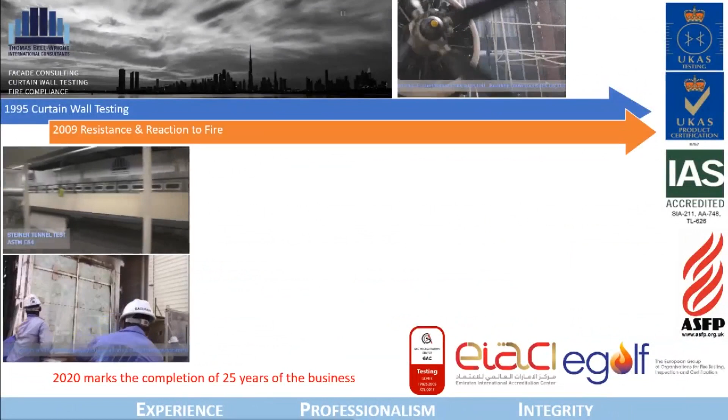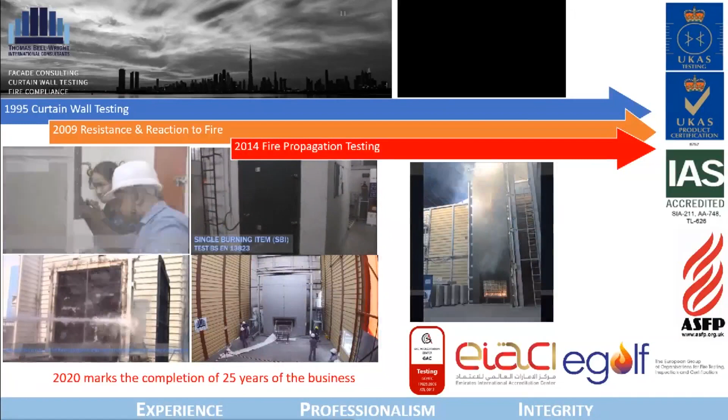Over the years, we expanded into doing fire testing, starting with a 3x3 furnace and a Steiner tunnel for reaction to fire tests. Over the last 7-8 years, we've expanded into reaction to fire as per European standards, as well as fire propagation tests as per American and British standards.

We also recently added 2 large furnaces for fire resistance tests, a 4 meters by 5 meters vertical furnace and a 4 meters by 5 meters horizontal furnace, both with load bearing capability, expanding our offering to probably the largest laboratory for passive fire protection products testing across East Africa right up to Bangladesh.

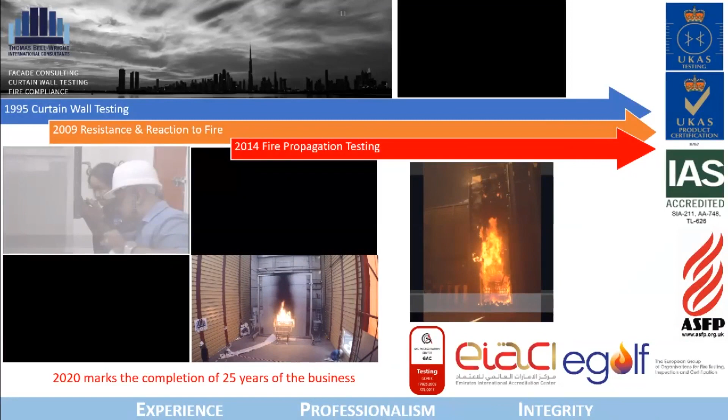Welcome everybody. We are today at the last session in the awareness series that we started back in April, and it has been a very interesting journey.

We have focused on passive fire protection and compliance, gone deep into comprehension and understanding of various aspects of passive fire protection compliance, understood what is a good way to procure and specify, and today we will talk about a very important aspect - after the installation, after the procurement and installation is started. This is a key element for the implementation of fire and life safety strategy.

A lot of us know that passive fire protection, a key element of fire and life safety, has worked over the last 3 decades. You would notice, as per this graph, that the number of fatalities have reduced drastically, showing that the strategies that have evolved over the years have worked very well.

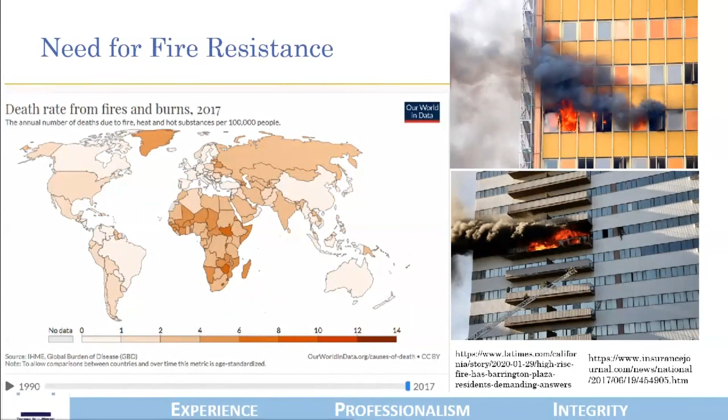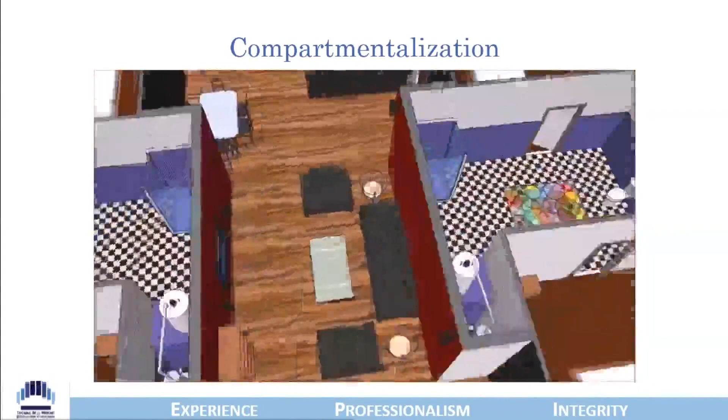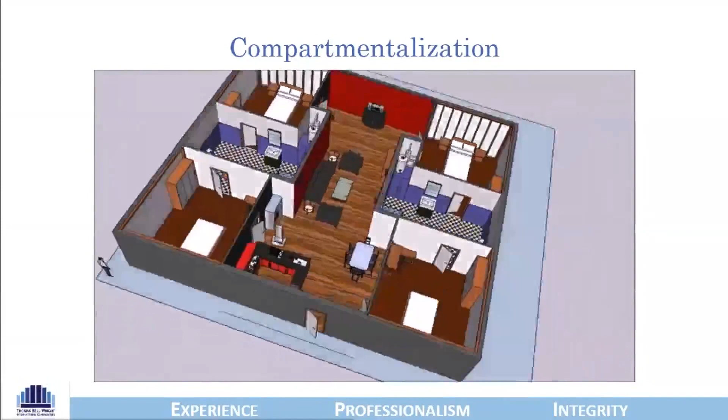A key strategy which comes out of passive fire protection is called compartmentalization. A lot of you might already be familiar with this as a fire resistance concept. As a basic, if a fire starts anywhere in a building, whether it's an office, a house, or any occupancy, it is designed such that the fire is contained within the place where it began. This is the basis of passive fire protection, so the fire should not grow and should be limited to where it started.

Now, in order to compartmentalize... I'll take a pause and get quick feedback if someone can reply back saying if I can hear, because I'm getting messages from some people whether it's starting or not. Could someone give me a ping back that you can hear me properly?

Super. Thank you so much, Mohammed.

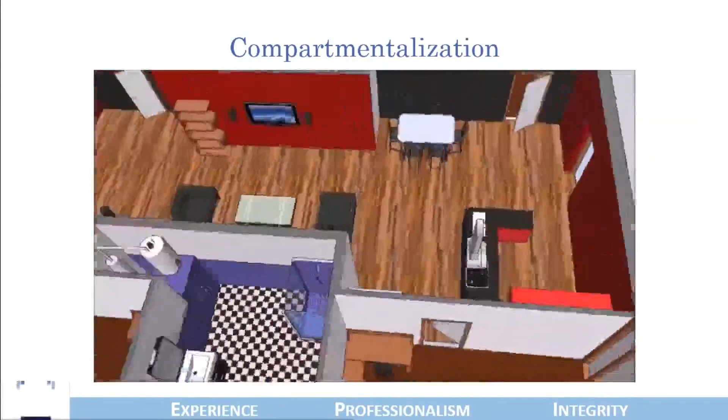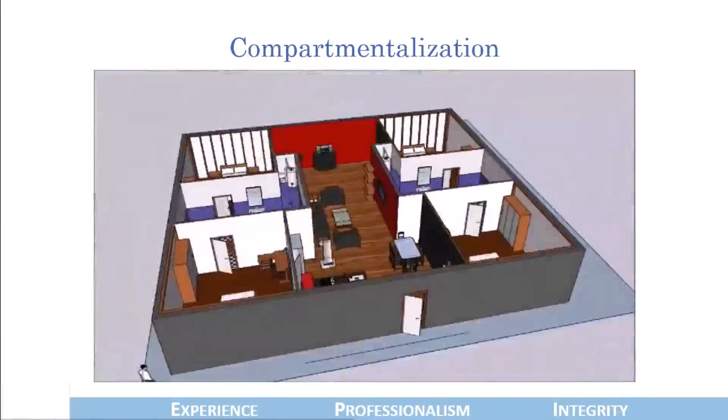So coming back, how do you make containment for any occupancy, any type of room that we are in or have seen? We would notice that we have wall systems and doors, which we all know to be fire rated. But for any building in any compartment to communicate with the outside world, we need openings, and these openings range from mechanical, electrical, plumbing, HVAC, and so many other types of breaking into what is a compartment, because all of us cannot live in an airtight, watertight place.

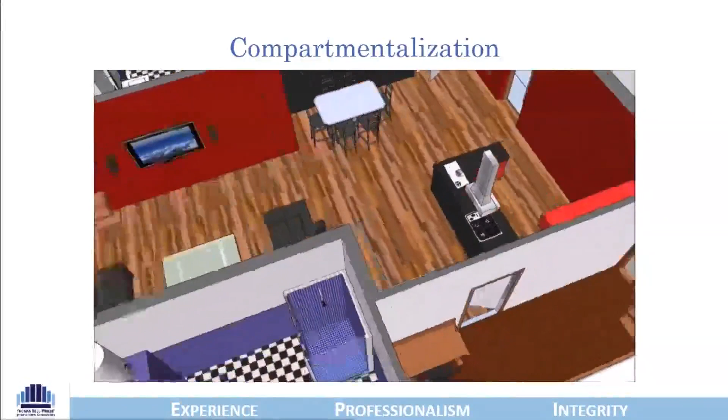So how exactly does the compartment get broken? People familiar with openings and fire stopping and MEP work know that whether going over the false ceiling or in several parts of the building with ducting, electrical cabling and piping, the compartment is broken into to create way or make way for various aspects that help the compartment in the building communicate with the outside world.

So what happens is someone designs and implements passive fire protection, procures approved products and materials, installs them correctly, and then as a next step, as part of MEP work and many other things, these fire-rated compartments are cut and broken into, and a lot of the walls and original designs become derated or no rated. So now the next process is that someone has to re-rate and bring back the fire resistance and compartmentalization which was designed. How do you do this?

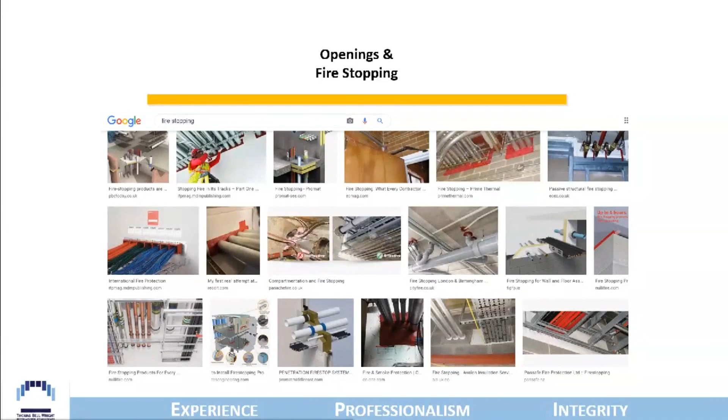This is where openings and fire stopping come in. People who may not be familiar with this, if you search the internet, there is gigabytes and gigabytes of data, images and videos describing fire stopping and how it's often done incorrectly, etc. I'm not going to delve into all such details, but specifically, we will talk about a better comprehension of how fire stopping is correctly procured, correctly installed, and correctly maintained.

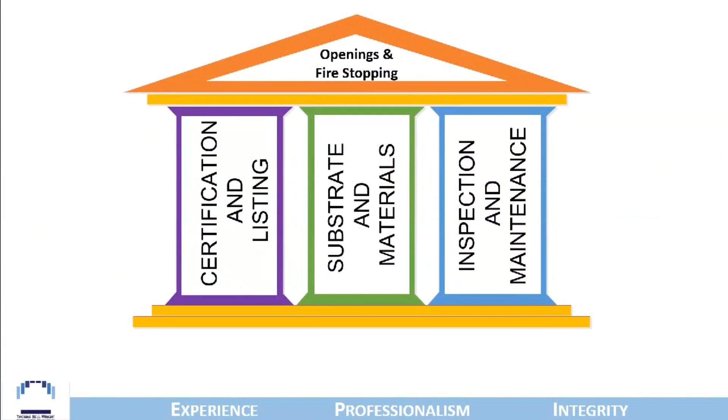And I start with some basics. I have put together some definitions with the help of my friend and colleague John Muse, who helped me create a good amount of information for my slides. So thanks to him.

I'm not going to read through all of these. The webinar is recorded, and one of the key benefits is that you can play back and read through for someone who would want to. I will just read through two types as a definition. What is a membrane penetration and what is a through penetration?

A membrane penetration is a breach in one side of a floor-ceiling, roof-ceiling, or wall assembly to accommodate an item installed into or passing through the assembly. When we talk about floor-ceiling, roof-ceiling, or wall assembly, we are alluding to fire rated assemblies, which means these assemblies are fire resistant to a given rating as per the design.

In the same line, I will read through penetrations, which is an opening in both sides of the floor or floor-ceiling or wall assembly to accommodate an item passing through the breach. The word breach is very important, as you will understand through the course of the slides, that the breach is done or the opening is made to a rated assembly.

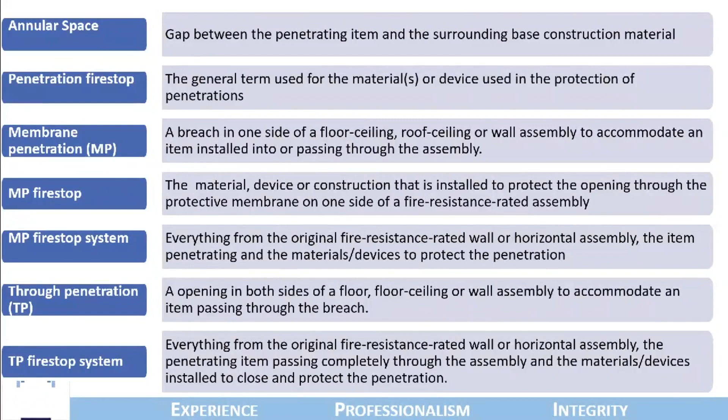These rated assemblies have been brought to shape, brought to form after many steps, right from the architects and designers who designed as per the code and local requirements what fire rating should be of a given compartment. These are cut through and broken into to facilitate the incoming and outgoing openings.

Moving on, a few more definitions. These definitions are more related to the North American standards, the F rating and the T rating. And I'll read these because these are interesting.

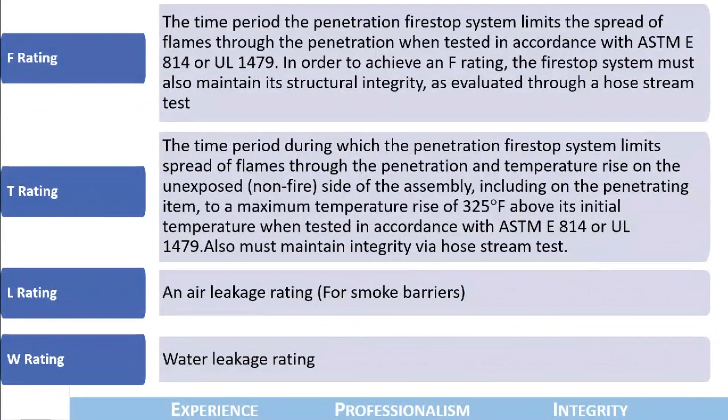The time period the penetration firestop system limits the spread of flames through the penetration when tested in accordance to ASTM E814 or UL 1479. In order to achieve an F rating, the firestop system must also maintain its structural integrity.

A T rating is the time period during which the penetration firestop system limits the spread of flames through the penetration and the temperature rise on the unexposed side of the assembly, including on the penetrating item, to a maximum temperature rise of 325 degrees Fahrenheit above its initial temperature, when tested in accordance to ASTM E814 or UL 1479.

These terms, though originally from the American codes, are often used in this region to describe similar ratings coming from the European or British test methods. An L rating is for air leakage, and a W rating is for water leakage.

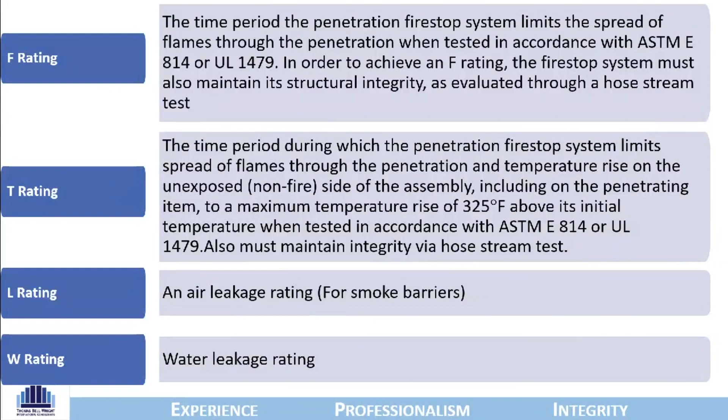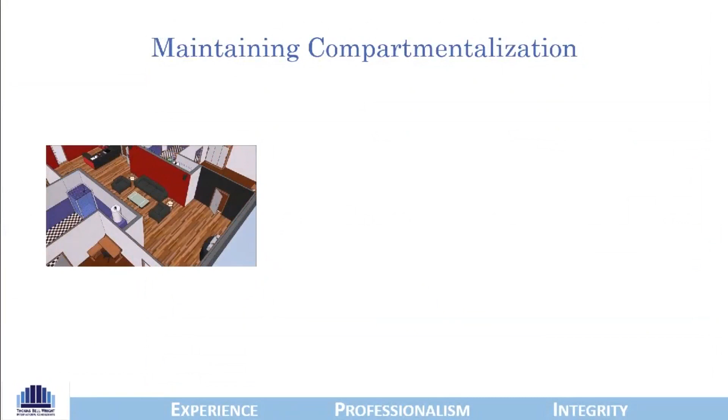Now, how do we really maintain the compartmentalization after you cut through and add on the fire stopping? A lot of us are familiar with images and concepts that when a fire happens, the compartment is able to contain the fire within.

For a few seconds, I would like you to imagine the photograph on the left, and imagine that the area above the false ceiling, above the television and the seating that you see, has openings which are carrying cables and ducts. So imagine how and with what properties the fire stopping material system design is able to contain the hot gases, the smoke, and the increased temperature on the other side of the wall where the fire is happening.

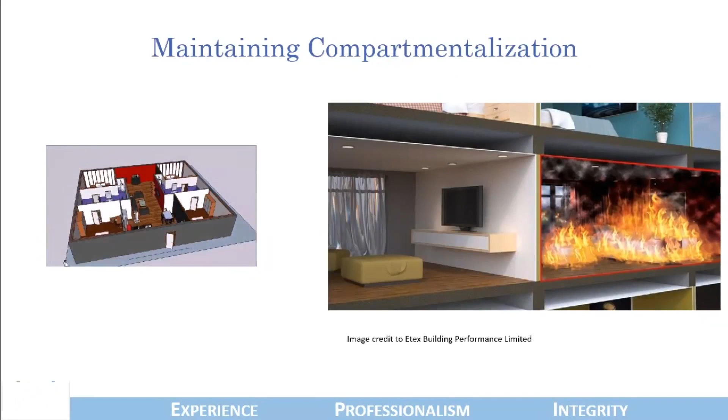This is where I would like to talk about certain properties which are used by manufacturers of fire stopping material, designers of fire stopping systems. These are primarily chemical or mechanical properties which bring about re-rating, or which help subcontractors re-rate the derated partition systems.

So let's start with intumescence. You must have heard the phrase lots of times. It is to increase in volume upon exposure to heat. An endothermic reaction, also known to a few, is a reaction when the system or components or materials absorb the heat, and using this heat, the materials decompose to create the fire resistance needed.

Ablative reaction is the reaction where the material resists heat transfer by using the heat of exposure to actually erode the material. Insulation, used in many other parts, is the property to resist the transfer of heat as a result of its low thermal conductivity.

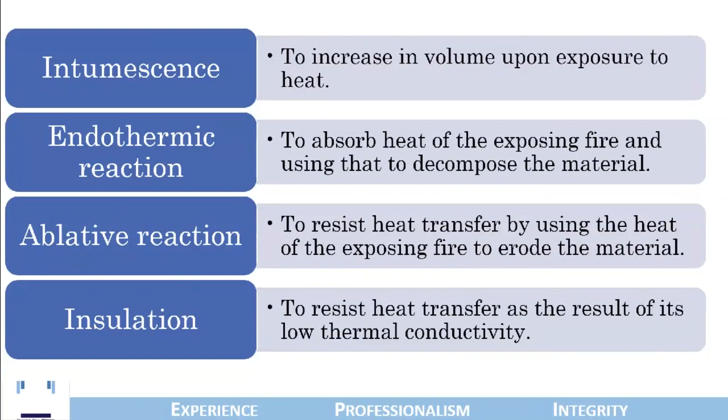Let's begin with understanding how these are validated or approved. There are typically two different methods to validate how an existing compartmentalized section of a building or an existing fire rated element, which could be a wall system or a door set, when cut through and opened, will regain its fire resistance through a series of installations and operations.

The first method is where the same test method used to validate the fire resisting element is applied. Let's take an example and imagine a gypsum board based partition wall system, which has been tested as per ASTM E119, an American fire resistance standard. Such a wall has been cut open for a cable tray as a through penetration.

Cable trays are laid and installed, and now various methods, systems, and materials are used to bring back the fire resistance rating of the wall system. The same test, ASTM E119, is performed to check and validate that the same rating can come back or not. This approach is often used

Some of you would have probably seen a fire resistance test happening for through penetrations. Sometimes these tests can be very interesting. This particular time-lapse video that you see is the European test being conducted in our facility, the EN1366, I believe -3 or -4.

These tests are specific tests for conducting or validating a general design as well.

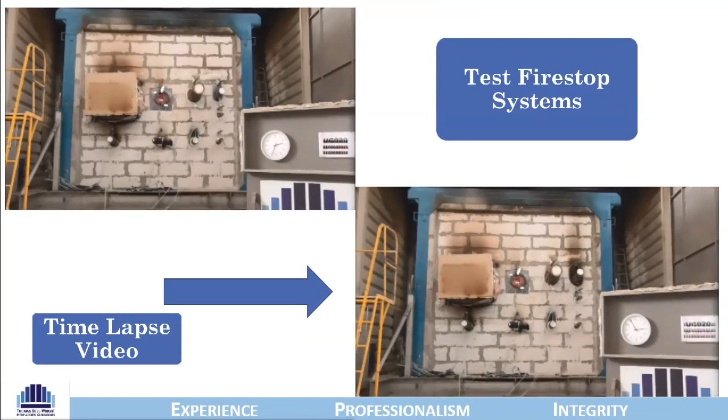Moving on, the test methods are just a simple piece of information or data that comes across for understanding how a given installation in a given set of materials which were installed in the laboratory performed.

Bringing me to my favorite subject of certification, listing and compliance, and how people often misunderstand certification. This becomes very important to understand when we are talking of solutions based on materials.

The certification of the manufacturing location is a series of steps that result in providing assurance to the buyer of the material of a given set of properties.

As an example, if we talk of caulking or mastic or any type of chemical produced in a factory, the product is sampled, tested in one or several configurations, and a comprehensive audit is done repeatedly at the manufacturing premises to check that the repeatability of that specific property, which has been validated in that specific configuration or series of configurations tested, will exist.

So the certification is of a given product, just one product. You can imagine a set of chemicals, and the certification says that these chemicals will perform as per the defined certificated property when they are installed in a given way.

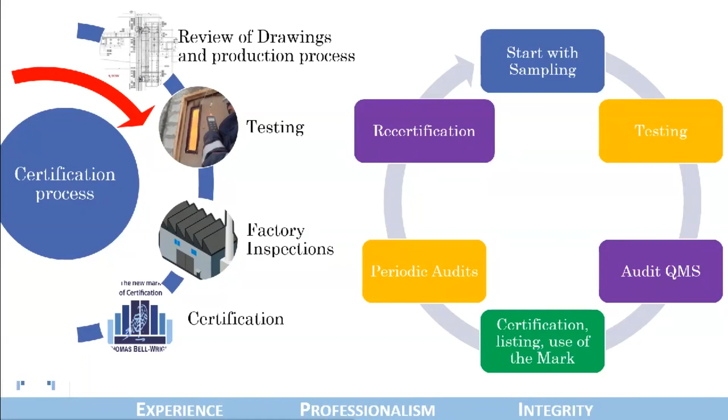And this wall system is cut through or broken into in almost any way desired by a given application, meaning the hole could be 1 inch in diameter for some cabling, or it could be a much larger opening for a large cable tray or a duct and so on. So you need a very comprehensive listing system to explain how a certified and listed fire stopping material would function and perform if it aims to come back and re-rate the partition to what it was supposed to be.

Several such codes define standard systems, standard designs, which are detailed in the directory. Often the certified manufacturer or certified manufacturing location will produce a product identified through a certification mark, a certification number. The listing goes to great lengths explaining all the properties. As an example, you see the F, T, and L ratings as compliance to ASTM E814 here, and the Canadian equivalent. These listings are often detailed not only through drawings, defining under what circumstances and in which system such performance or repeatability of performance would be available, but several other aspects are frozen.

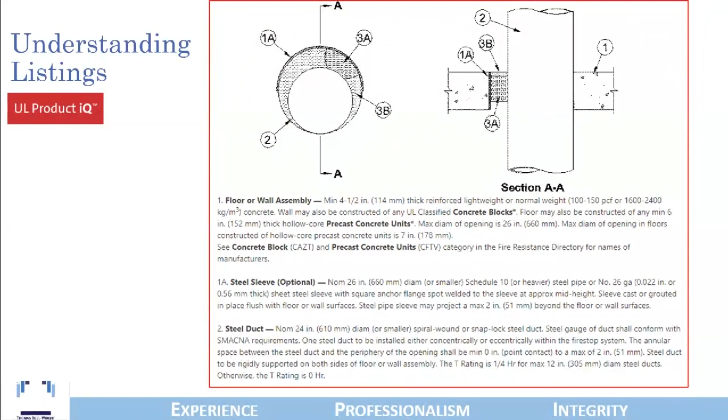I will read a few more examples for everybody to just steep a little more into this. This is from the Intertek certification directory, the Warnock Hersey directory. Often you would notice, like in this case, that the product description for the double wall duct system, which is the listing itself, runs into 38 pages. And the listing combines information about a few designs and quite a few different test methods.

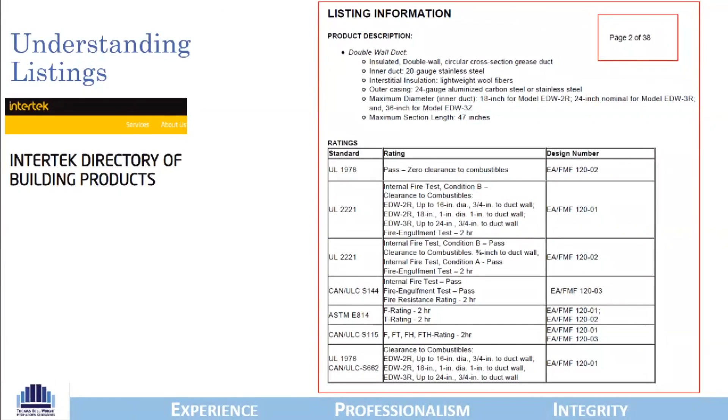This looks pretty daunting to someone who may not understand the intricacies of what this is and how it may be arrived at. It's good to step back and imagine that it started off with a project that wanted to demonstrate and prove compliance of a specific chemical compound or material, that it is able to produce the fire resistance characteristics in a given design. What followed is a series of projects and tests done to prove to certain specific projects that their materials, or materials of one supplier, can be installed in several design configurations which are detailed.

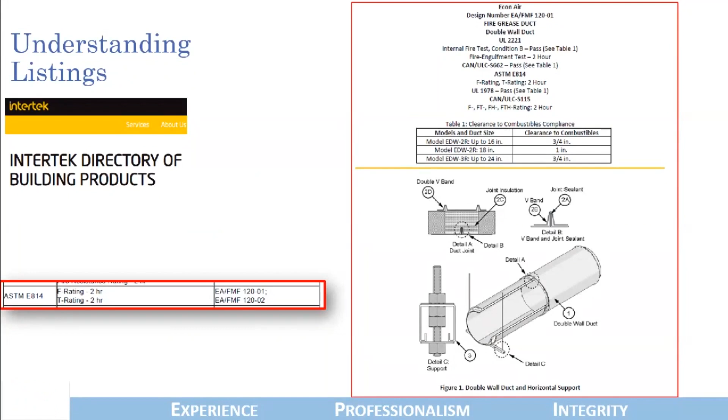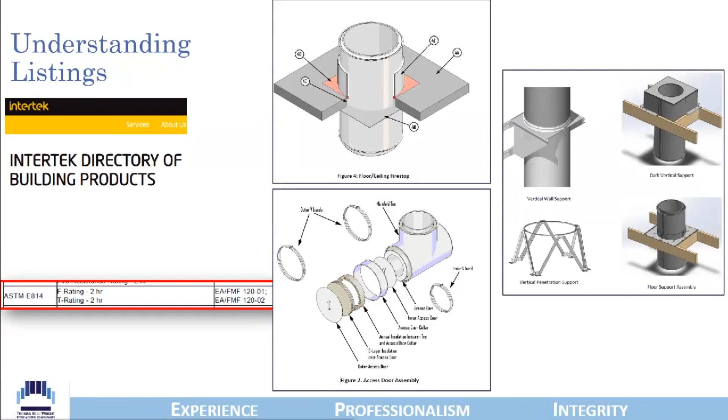These different configurations go on adding up to more and more data to prove that the given component supplier, which repeatably produces the material, is able to demonstrate this repeatability of fire resistance in several different designs. Hence, there are several product manufacturers whose listings run into many pages, because over a period of years they have conducted a large number of tests, and many tests have been correlated with data, with information, with knowledge of the certification bodies who are able to provide the assurance that a given material is able to offer compliance to given tests, provided they are installed along with defined materials, in a given detail.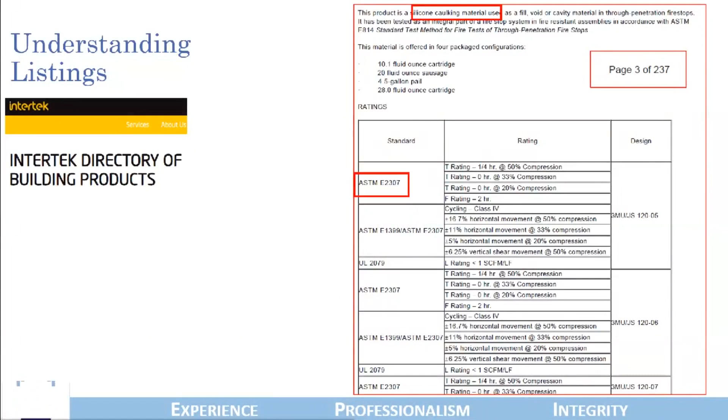As an example, this listing is of a silicone caulking material, and this listing is 237 pages, which means that the material, offered in different configurations, has several designs under which it has either been tested or evaluated. The performance of the T rating, F rating, etc., is assured only if it is installed in those specific combinations and in those specific materials which are detailed and defined.

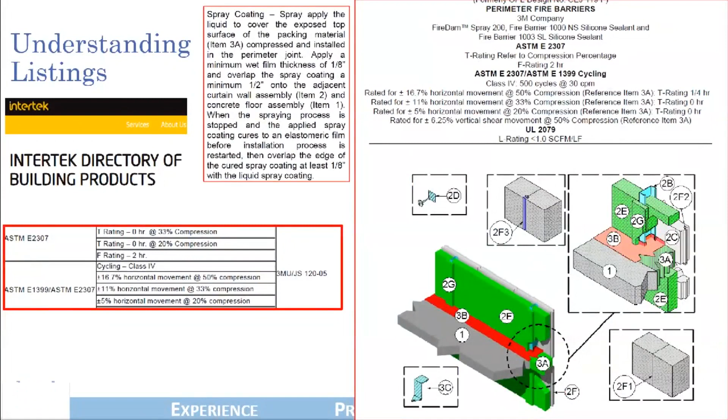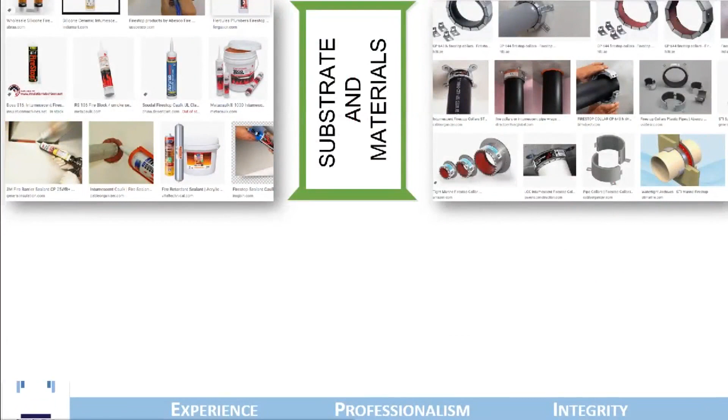This brings me to a very well-known concept, but probably not very well understood subject: the understanding of substrates and materials. A lot of people may relate to paint as an example, where the application of paint, if done incorrectly, or if applied on a surface where it does not bond well, or if the surface is not at the correct ambient temperature and environment in which it is supposed to be painted, the paint does not last.

This is very important for people who are new to the subject to understand that if a paint has been able to demonstrate its performance when applied to, let's say, stainless steel, the same performance cannot be expected if the paint is applied to a concrete wall, a gypsum board, or wood of a given type.

Almost the same goes for a lot of, or almost all, types of fire stopping material. Because if you go back and imagine those slides where we talked of chemical reactions, for these fire stopping materials and systems to function, to be able to bring back the fire resistance rating which was originally designed to keep, let's say, a 2-hour rated corridor, it can only function if the substrate onto which it was tested, listed, and demonstrated to function on, and the installation method, are the same. Only then will the fire rating actually function.

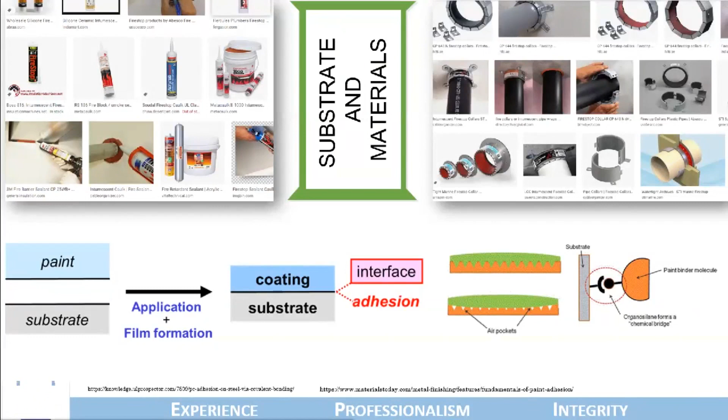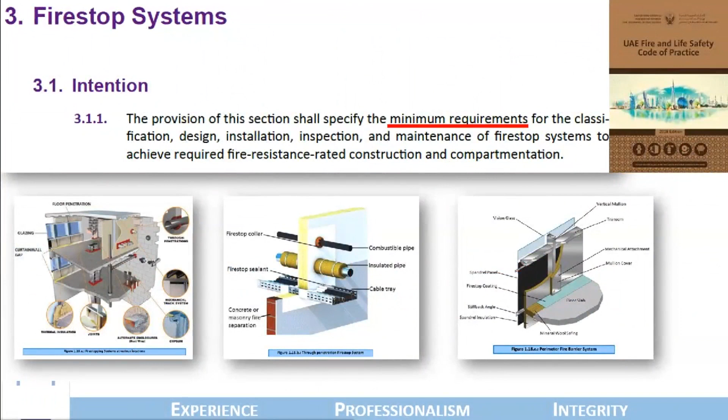Often these requirements are detailed very well in codes, standards, and specifications, but sometimes not so well, and sometimes people don't quite comprehend what these things mean. I'll take an example of some pages from the UAE Fire and Life Safety Code, though I'm pretty sure other codes in the world are all in a similar direction.

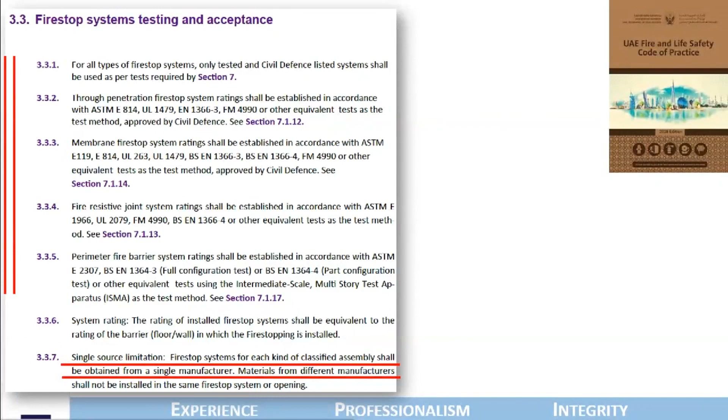The UAE Fire and Life Safety Code, as many of you are familiar with, points to multiple standards—American, European, sometimes even British—to demonstrate conformity or compliance to a given property. But a very interesting line is in section 3.3.7, which I will read: there is a single source limitation, meaning the fire stopping systems for each kind of classified assembly should be obtained from a single manufacturer. Materials from different manufacturers should not be installed. This is alluding to the fact that if a listed system has been defined in a given way, you cannot just interchange manufacturers.

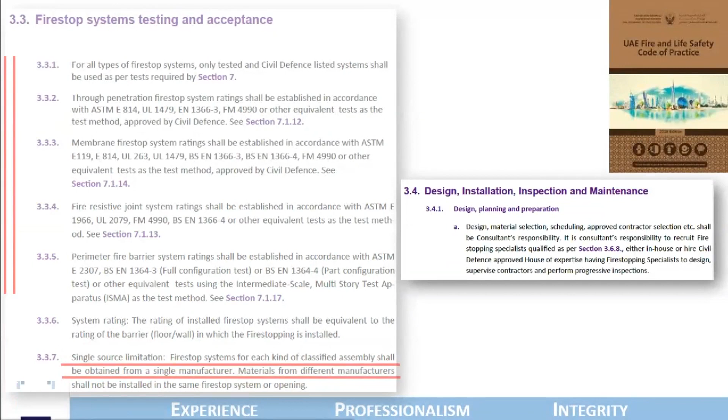The code goes on to detail several equally important aspects—as I said, you design, you install, you inspect, and you maintain. The Firestop Contractors International Association, FCIA, also talks about this on several platforms, which they call DIIM: installation, identification and labeling, inspection and field control, maintenance, and management.

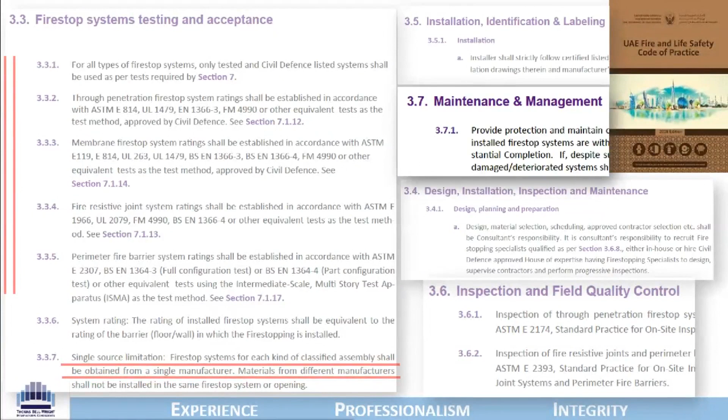These very important aspects are detailed in the code, defining how and why these things should be maintained. This is kind of the beginning to understand the importance of inspection and maintenance.

If you give a few seconds and imagine the scenario, there are a bunch of people in a manufacturing location doing their jobs every day to ensure exact repeatability of the chemical compound produced and released out of the factory. We can all practically imagine there are deviations—suppliers change, components change, quality processes are not exactly machine repeatable, people change. We are in difficult times, an era where people movement and material movement have been restricted, but would you continue to get the same product and the same material?

Probably not. This is why it's very important that people understand the subject of fire stopping, right from the detail of how fire resistance is created and maintained in original partitions. Imagine a fire rated wall assembly designed and installed using a manufacturer's gypsum board, where only the manufacturing location of the gypsum board is repeatedly audited to ensure the same board is produced. But the steps equally important to ensure the same design is installed and the same components are used in installation may or may not be there.

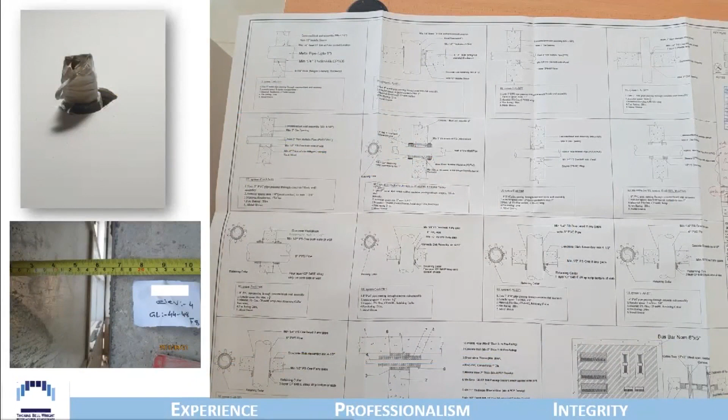And how the original rating is to be brought back again after cutting in. So you need a good bunch of inspectors who are specialized in the work that they do. It's not someone who may just be able to say 'look at that and look at that,' or someone who is able to read the drawings. You need someone who is able to read the details of the given project, and also go back and refer to the listings and how the listings define limitations.

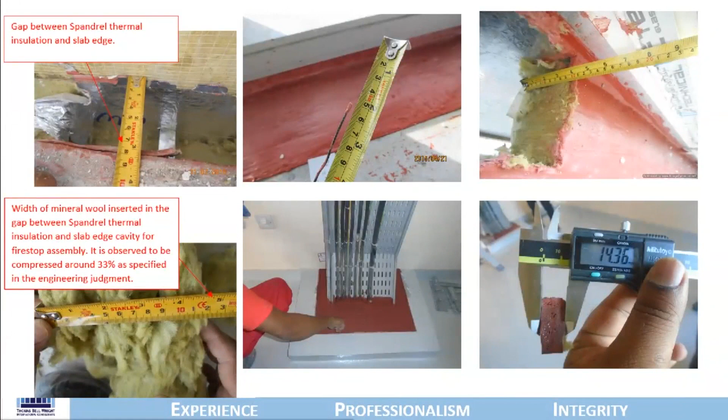You need a specialist inspection agency as defined in the UAE Fire and Life Safety Code in several places, where a lot of details which are probably not submitted as part of the project, but details which are on the listings, on hundreds of pages of listings, would need to be cross-referenced and checked to ensure that the re-rating is actually brought back to what it originally was.

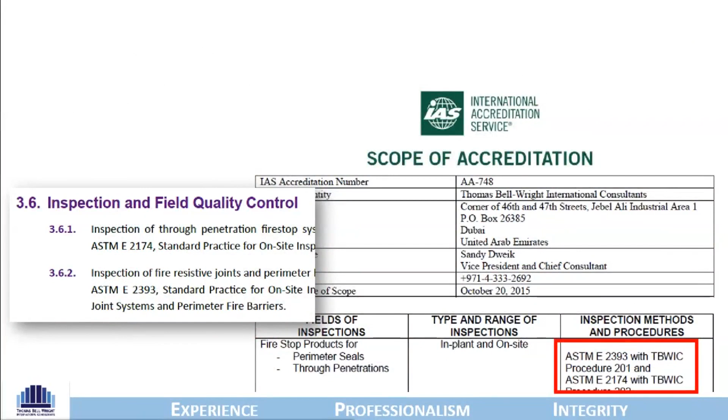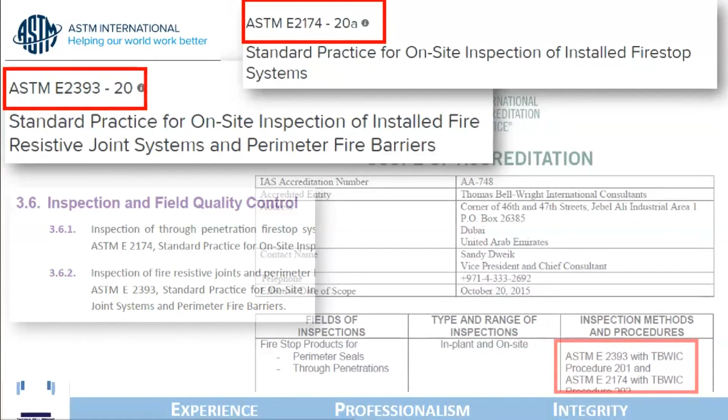This brings me to two very good ASTM standards, which are referred to in the UAE Fire and Life Safety Code of Practice as well. Someone was asking about the ASTM standards - these are ASTM E2174 for on-site inspections of installed firestop systems, and E2393 for the on-site inspections of installed fire-resistive joint systems and perimeter fire barriers.

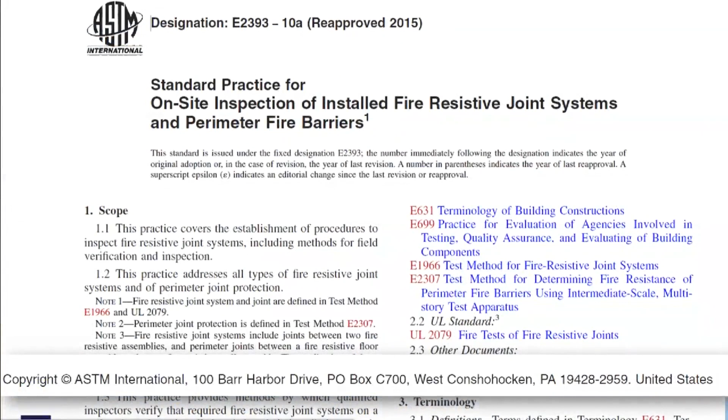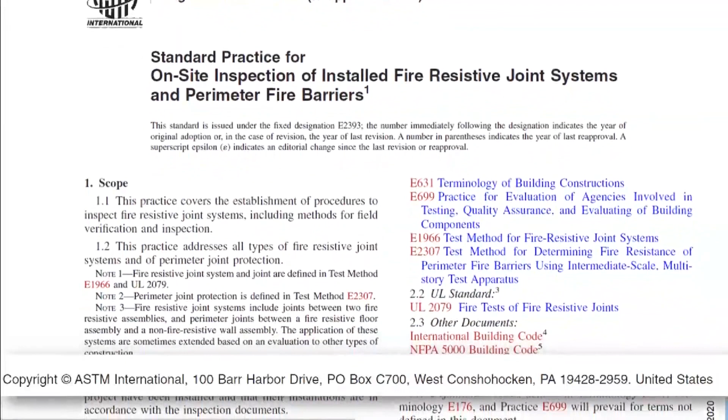I would encourage people listening to this webinar today to look up these standards and do a quick read of these two very wonderfully designed standards, because the subject of installation of fire stopping material is very, very important.

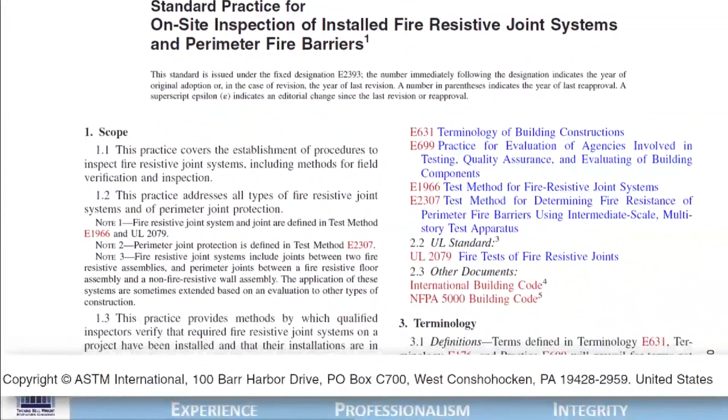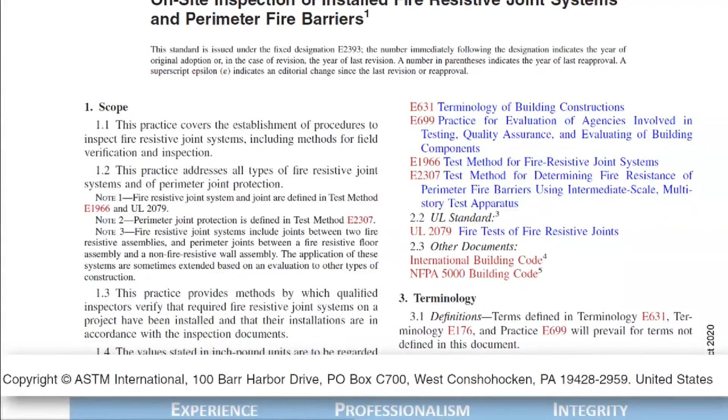If you imagine the example I was sharing, that you spend 100 to 140 million dirhams out of 400 million for derating and re-rating the fire and life safety strategy, this is the key strategy which is important to ensure that people's lives are not under threat.

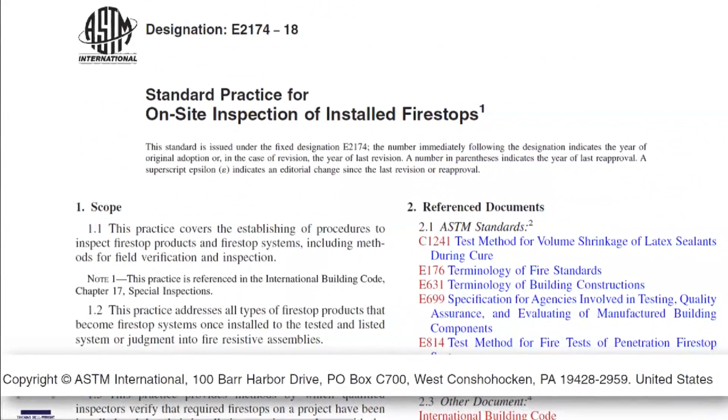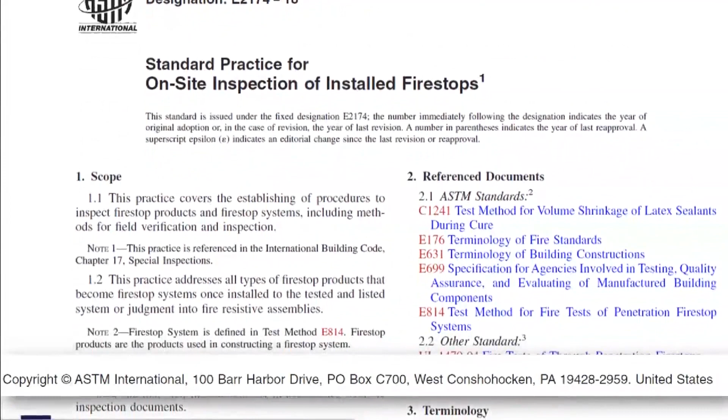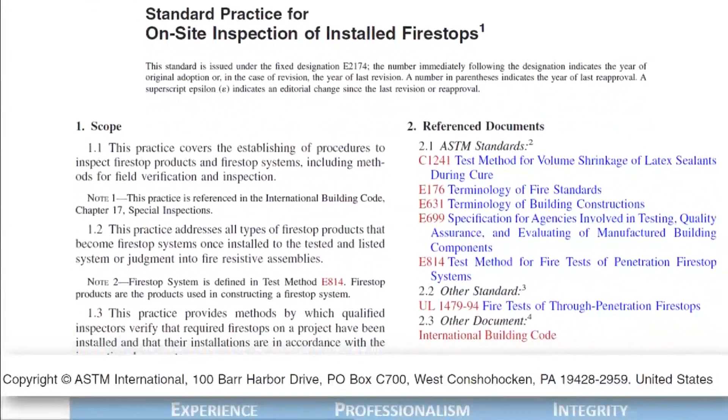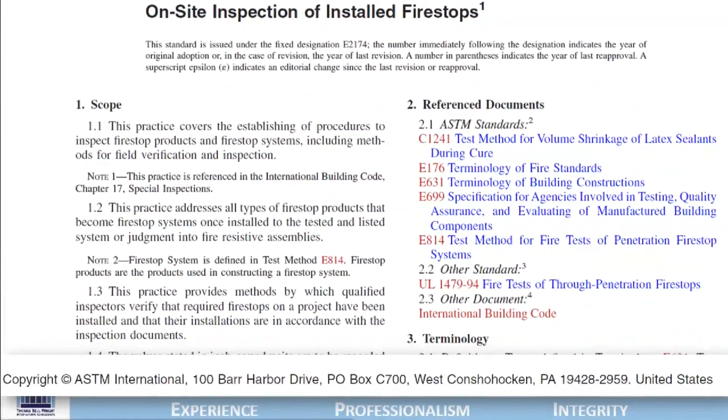So yes, I would encourage you to give a read to these standards, and these standards will also give a very good insight to authorities having jurisdiction, to insurers, to contractors, to get a better understanding of how to ensure specifications and contracts are written, and to make sure that the activities we are involved in are able to align with what was originally designed and originally thought of in the fire and life safety strategy.